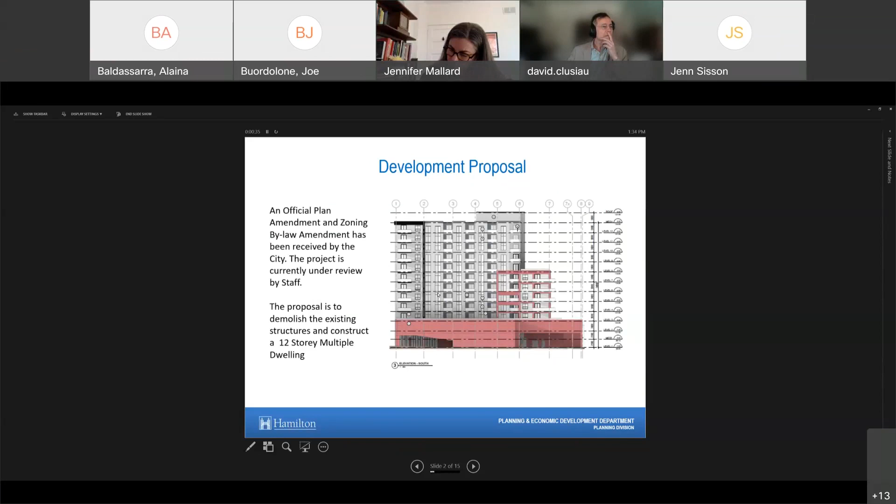An official plan amendment and zoning bylaw amendment has been received by the city, and the project is currently under review by staff for comments. The proposal is to demolish the existing structures and construct a 12-story multiple dwelling. Details about the proposal will be provided by the applicant.

The yellow star shows the location of the site. The property is bounded by three roads: Hunter Street East to the north, Liberty Street, and Ferguson Avenue South.

These are some area photos. This is looking north from the subject site to the opposite side of the road on Hunter Street East. This is looking west on Hunter Street East from the subject site. This is looking east on Hunter Street East to the subject site. This is looking north on Liberty. The subject site would be on the east side, or the right side, of this photo. This is looking north from Ferguson Avenue South, and the site would be on the left side of this photo.

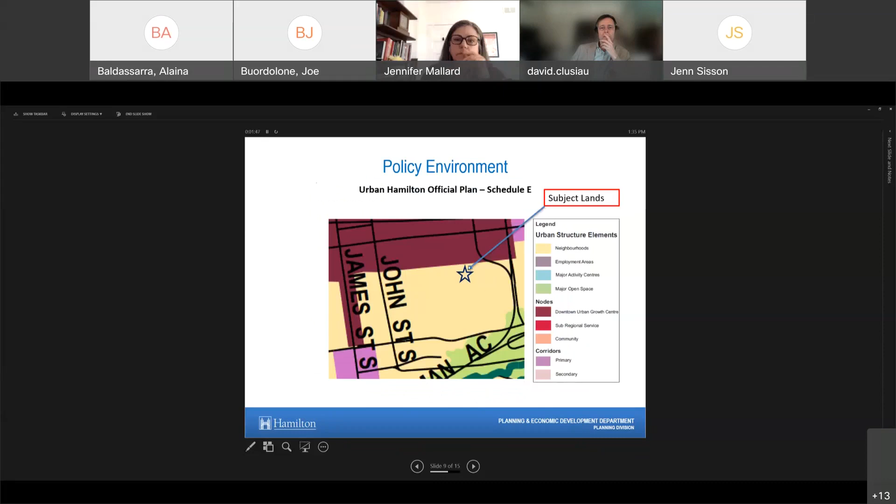The Urban Hamilton official plan identifies this as neighborhoods on Schedule E, shown with the blue star on the slide. The designation is neighborhoods, again shown with the blue star on the subject site.

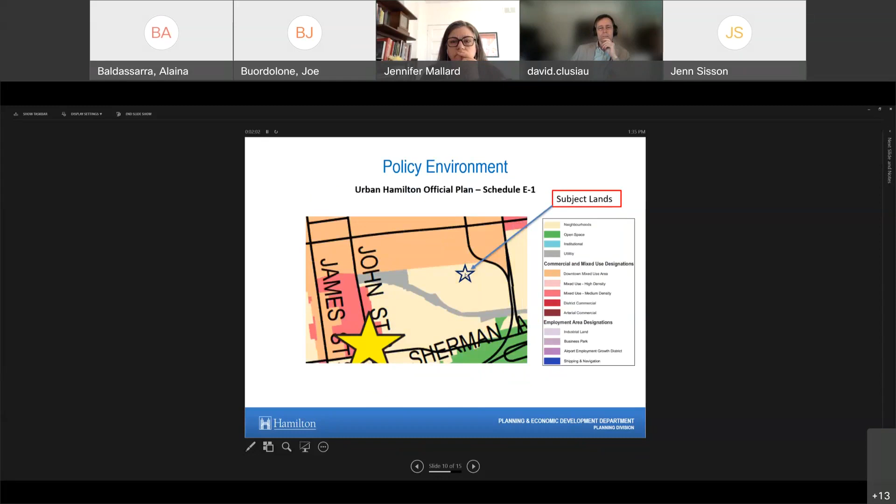Some of the major themes for the neighborhoods designation: sites shall primarily consist of residential uses and complementary facilities to serve the residents. The existing character of established neighborhoods in designated areas shall be maintained, and residential intensification in these areas shall enhance and be compatible with the scale and character of the existing residential neighborhood. This would include use, form, transition, and character of the proposed development. It also asks to respect and maintain or enhance the streetscape patterns—setbacks, building height, separations.

In terms of the urban design policies, similarly, the policies ask to respect the character, built form, and landscapes of the neighborhood, contribute to the ambiance, the streetscape, the amenity areas, and the pedestrian areas. Complement the existing character, color, and surrounding context, and create pedestrian-oriented places that are safe, accessible, connected, and easy for people to navigate.

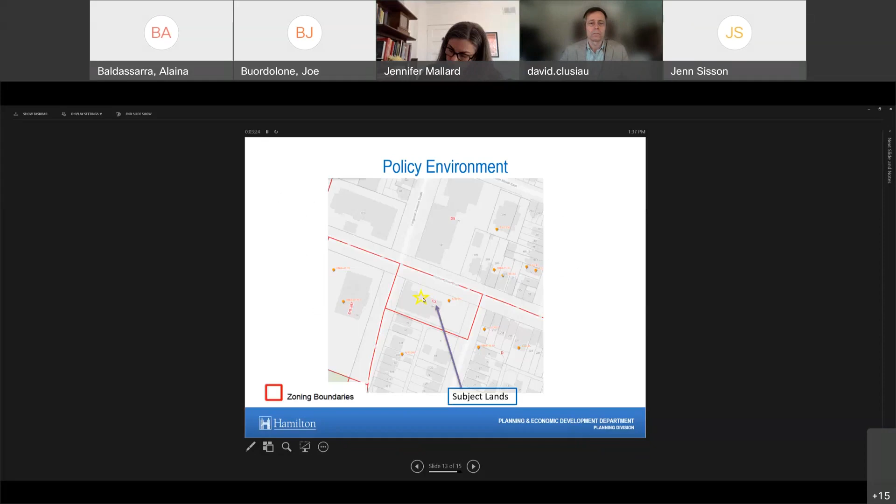The property is currently zoned community commercial C3, as shown by this yellow star on the slide. The permitted uses on community commercial zone include, but are not limited to, a range of commercial uses as well as a mixed use building. For a mixed-use building, dwelling units are only permitted above the ground floor, with some common areas permitted at grade, but can only occupy 50% of that floor area. The maximum building height right now in the current zoning is 14 meters.

So today, the areas of discussion we would like to talk about are: does the proposal represent compatible integration with the surrounding area in terms of use, scale, form, and character? Does the proposal organize space in a logical manner through design, placement, construction of new buildings, streets, structures, and/or landscaping? And is the proposal massed to respect existing and planned street proportions? That's the end of my presentation.

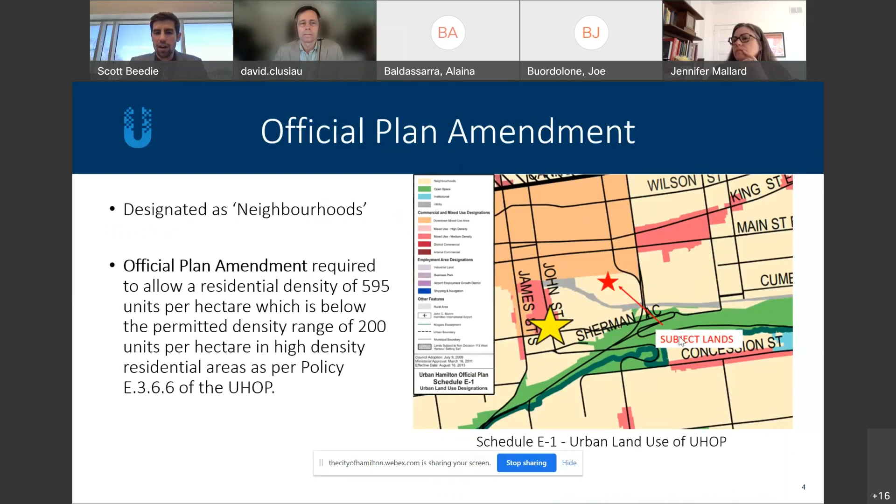Similarly, a zoning bylaw amendment is required to rezone the subject lands from the community commercial C3 zone, of which it is currently in, to a site-specific E3 high-density multiple dwellings district in the City of Hamilton zoning bylaw number 6593.

And I'm going to turn it over to Edward Thomas now to take you through the proposed site design. Thank you, Scott. The plan that's in front of you now, you can see Hunter Street is top of page and north, and Liberty is to the east and Ferguson to the west.

We're proposing at grade facing Hunter Street to have residential units that would have terraces and doorways facing to the street. That would be on the west side, those 4 units on the west side of the property.

To the east, we have an amenity area that would be glazed in with an outdoor space right adjacent to that, facing towards Liberty Street to the east. In the center would be the main entrance to the apartment building, directly off of Hunter Street.

To the south, or the furthest distance away from Hunter Street, we have our vehicle access. Off of Ferguson Street, we would have underbuilding handicap parking and visitor stalls, and a ramp to the underground parking.

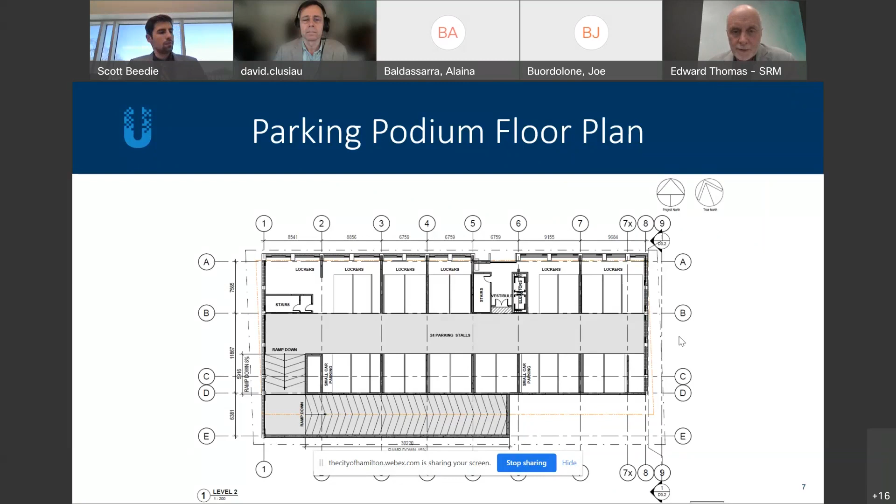The building form is 12 stories high to the west, stepping down to 7 stories as we move to the east, and stepping down to 2 stories as we get to the very extreme eastern side.

So what you see on your page now is the rooftop of level 2, which would have no built form from grid line 7 to grid line 9, above the second level.

Next slide, please. These are the elevations. In the upper left-hand corner, you have the elevation that would be facing Hunter Street, and Liberty Street would be to the left side, and it's 2 stories high, with the amenity space at grade, the entrance to the building, and the entrance feature.

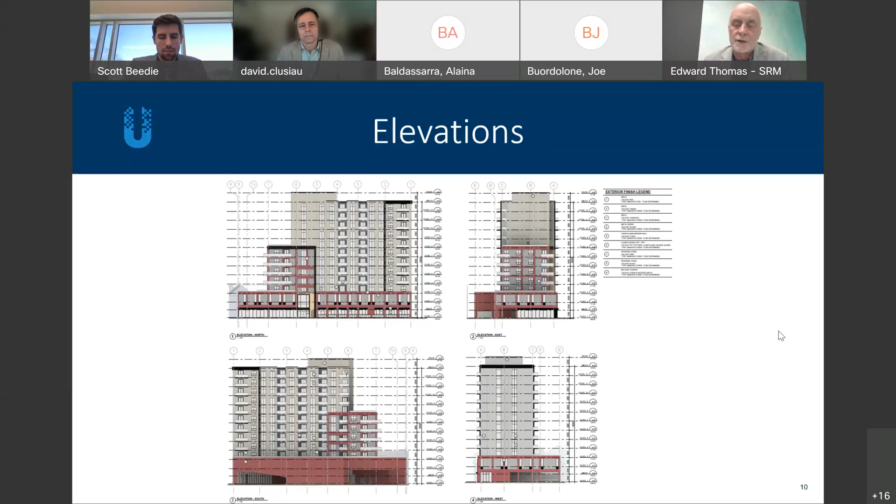Here you can see the ground floor units that would be at the base, the parking level, and the treatment that we're using for the elevation in front of the parking area, and then the rooftop terraces and the balconies on the units as we go up.

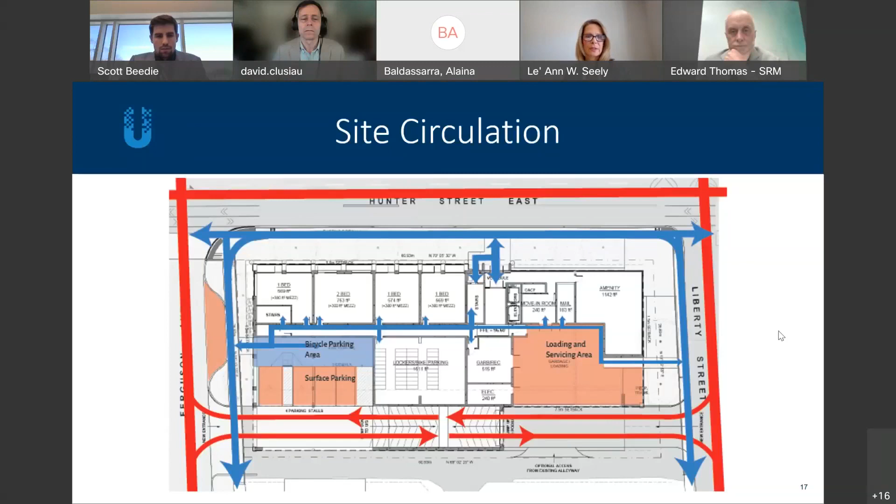The layout also keeps parking out of sight with access to it off Liberty and Ferguson. The ground floor patios animate the streetscape, and the main entrance, as you can see, is directly off Hunter, with secondary ones off Liberty and Ferguson. And bike parking is also easily accessible, off Ferguson. Next slide, please.

Enhancing the streetscape along Hunter, Liberty and Ferguson, the streetscape is enhanced with the design of street trees and landscape strips, grass-lined boulevards, and sidewalk connections to the surrounding context. The patios at grade are edged with ornamental fencing and evergreen shrubs for visual interest and visibility to the street, providing year-round interest for the passerby. That's it for me, thank you.

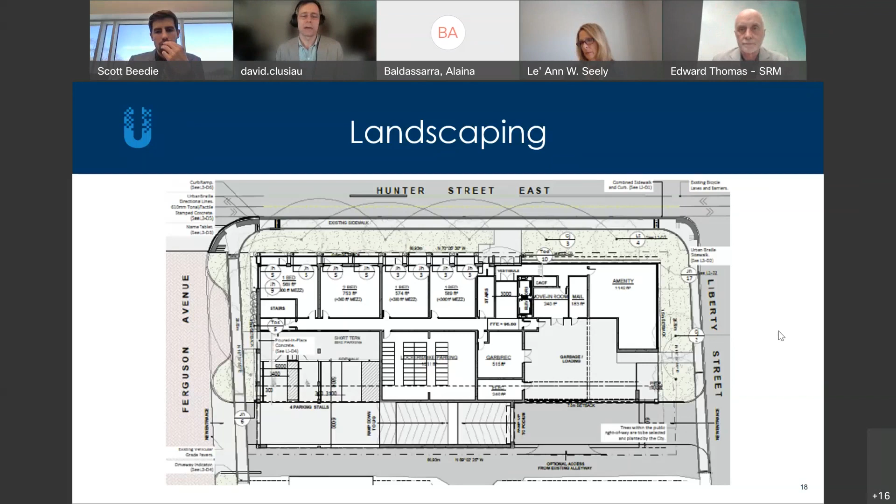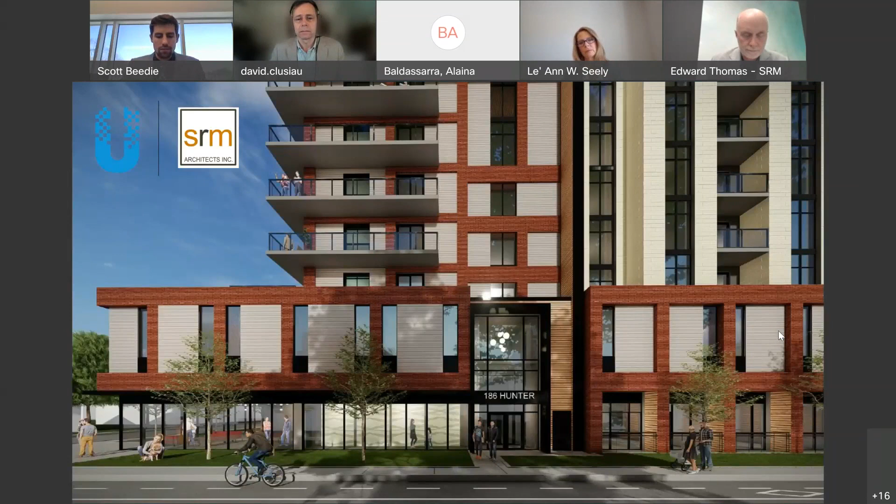Thank you for the presentation. I was wondering, there is a slide showing the angular planes, but in my opinion they look fairly ignored, so I just wanted to get some clarity on that.

So we are on Hunter Street East, which is a collector road, and as I said, we are in close proximity to that downtown secondary plan. As you can see, the low-rise dwellings abutting the site to the east have that angular plane. There's not one shown here, but they do have that step down informed by the angular plane to respect the transition to those lower uses. While that angular plane is not achieved on the west side, as mentioned by Edward, that's where a 20-story multiple dwelling currently exists, so there's a little less priority placed on that. I do recognize that on Hunter Street East you see that line cut through the taller 12-story portion of the building, however the step down on the easterly side does fall within that. Essentially, one of the challenges of this site was the constraints of its size, and we did our best to implement a transition that efficiently provides affordable housing units while also respecting the surrounding low-rise character. Thank you.

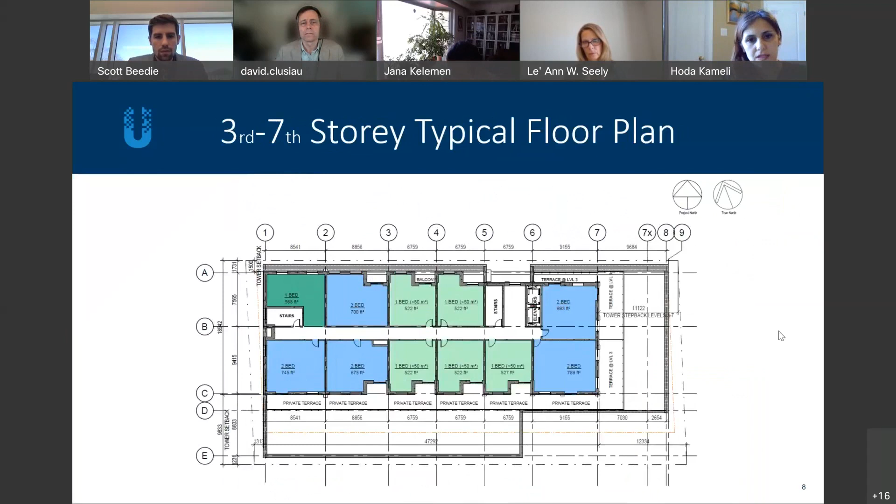Hi, thank you for the presentation. I had a question about the top of the podium on the south side and east side, where you have the private terraces on the south side. Is the rest of the top of the podium going to remain just empty, or is there any plan for that?

I'll let Edward speak to this one. We're in consultation with the ownership group about how that could be used, but our intent would be at a minimum a green roof, so that'd be a pleasant overlook from the units above. What we're discussing is the size of the terraces and what would be appropriate for those units, from a pricing point of view and looking at the supportive housing aspect and where we want those units to be.

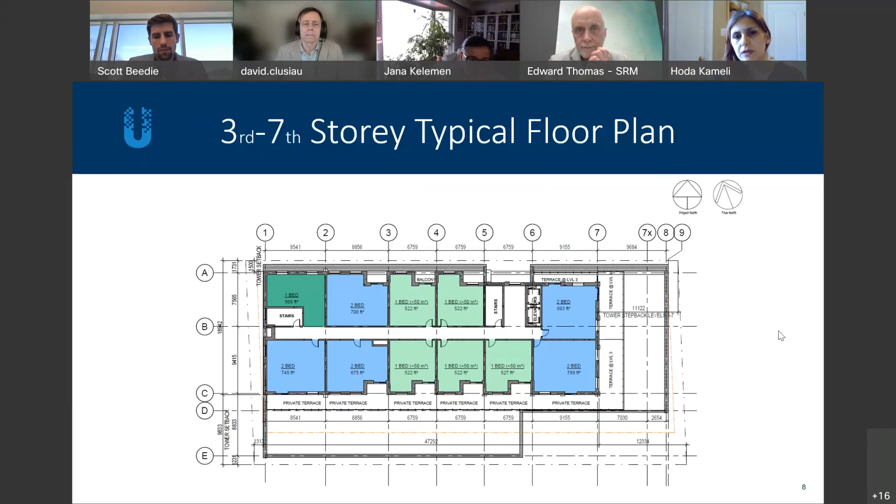The other question is about the ground level units that have a terrace toward the north, toward Hunter Street. Those are closed terraces - is there any access to go outside, or do you see those as just closed terraces?

Yeah, we would provide doors from the units out onto those terraces. We find that we get a lot of different opinions depending on the demographics and the neighborhood, whether people want that from a security point of view or not. I'll just say personally, I think it's great for people to be able to walk out of their unit onto a terrace. And as we saw with the landscaping plan, we're also planning to enhance along Hunter Street and along Liberty Street with landscaping, using landscaping as well as some built form to create privacy for those terraces.

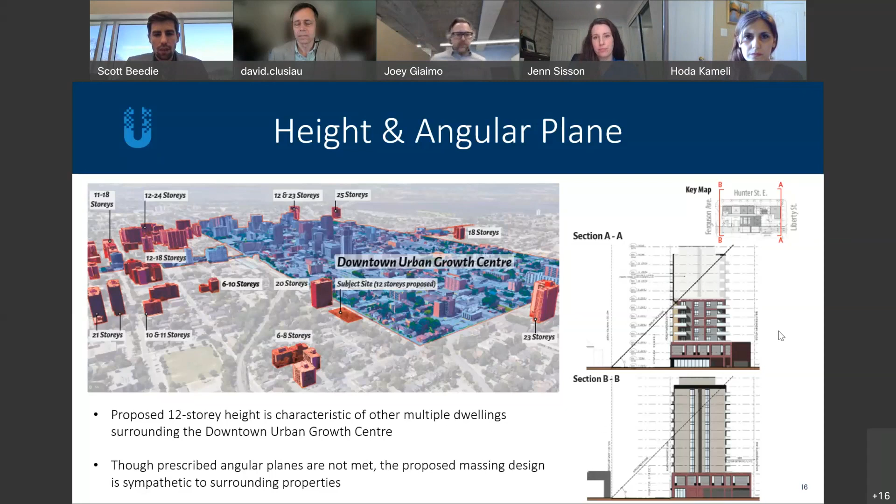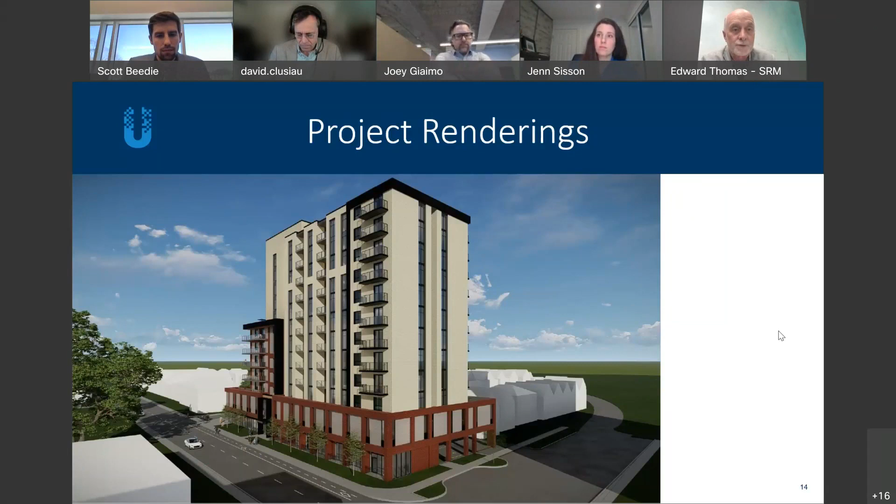Ed, I'll let you speak to this one. Sure, this one's my favorite topic actually—where are we going to go with cars? I try to promote to my clients to provide above grade parking that can be converted to space later in a world where we have driverless vehicles. So to answer your question, yes, we can essentially build a waterproof basement 2 stories down and take the parking down there, and that space we're providing for vehicles on the second floor could be provided underground. It'd be more expensive, which would impact the affordable housing aspect of the project. But I feel quite strongly that the development of where the car industry is going in terms of subscribership, etc., means a space like this would allow that second floor to be converted in the future to more habitable spaces, whether that's more residential units, amenity space, or commercial uses.

Okay, thank you, that's interesting. Related to that, what percentage of the units are going to be affordable? That is still being determined with the client. Ultimately it will be dependent on the needs once it's being brought to market, and an analysis on the affordable housing needs at that time and what makes most sense on their front. But it will definitely be an important discussion to have in the future.

Thanks, Scott. And was at-grade commercial or retail space considered? For this particular site, I don't believe it was from the get-go. It was more so discussed as a residential opportunity, specifically with regard to affordable housing. So there hasn't been a lot of discussion around the opportunity for providing retail at the base of the development.

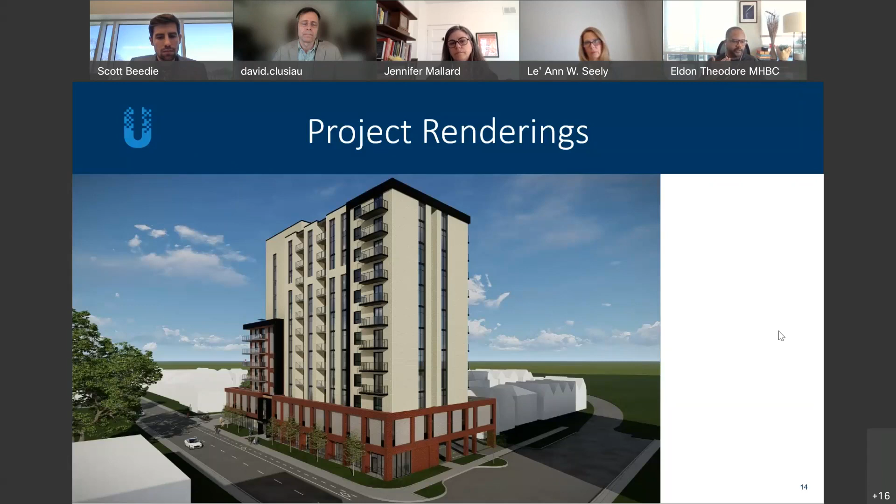My questions relate to a couple of things. First, on the Liberty Street side of the plan, it looks as if part of your internal loading area is exposed. Is there any screening there, or is it open air at the first level?

I'll speak to a couple of those, and then I'll let Le' Ann speak to the landscaping along Liberty that's adjacent to the amenity space. Currently, the garbage loading area is not screened - it is open air. We're also in early discussions about where the transformer would be on the site where we bring in power, and I'm assuming that will come in off of Liberty Street in that general location.

With respect to the second floor parking area, we can easily accommodate units - it could easily be renovated along Hunter Street and maybe along Liberty and Ferguson, but the depth of the podium is deeper than you'd want for residential uses. So it would likely be converted to residential uses and something else, often tending to be more amenity space, or part of it could become commercial space if there was demand for office space. It could even be workspaces for residents in the building. What I envision when I designed these spaces is that all along Hunter Street, that second floor would become residential spaces, and the structural grid and systems we have in place would easily accommodate that from the third floor above to the second floor below to allow for plumbing and mechanical issues.